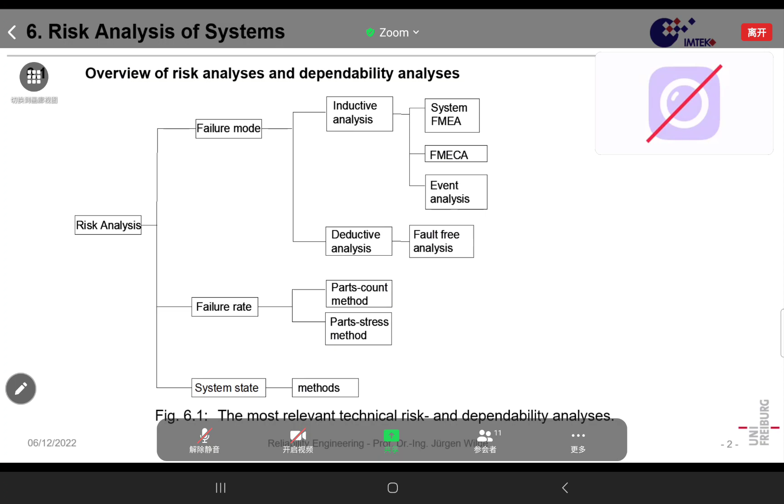Okay, there is a simple model, and that model is the so-called reliability block diagram. Imagine you have 3 resistors or more resistors in a series, or you could also say conductors, all carrying the current, and the current is the equivalent for the function of that system. So that means if you break one of these conducting elements, the complete current will break down, and you will have no more function.

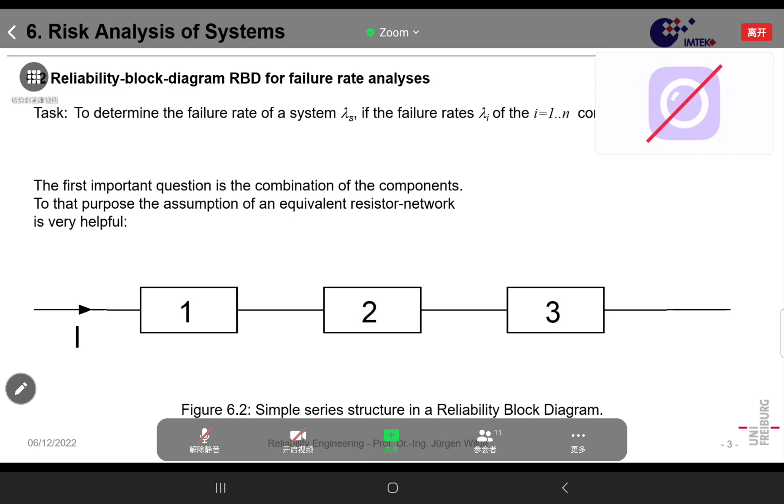Now, over time, as we know, the reliability will go down for every element. Now you want to know: you have two elements, and both elements must function after a certain time.

Then you could say the reliability of element i is Ri of t, and of the second, it is Rj of t. So reliability has gone down, and reliability, as we know, is just the probability of function. So we have here time, and we have here two reliabilities, that is i and that would be j. The probability that i works and j works is Ri multiplied with Rj.

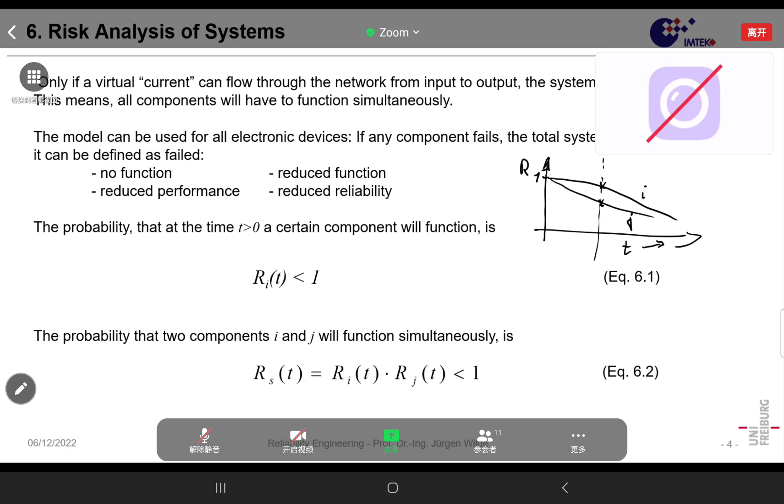And that simple model can be generalized to n elements. So if you have n elements, the system reliability will be just the product of all reliabilities over t, from element 1 to element n.

Okay, when you have that, you can say what is the failure function of element i? That is 1 minus Ri of t, and that is, if you assume an exponential distribution, 1 minus e to the power of minus lambda t.

In very short times - short always means significantly shorter than the mean time to failure of that element - then you could say the failure function, or the failure probability, is roughly the failure rate multiplied with the time. So here, lambda to the power of -1 is just mean time to failure in an exponential function.

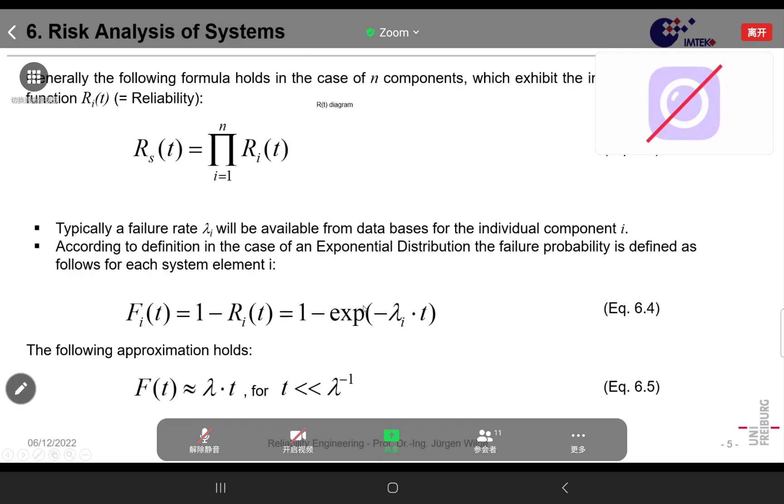So then when we have that here, we can describe the individual Ri by that exponential function. So here we see that Ri of t is e to the power of minus lambda i t. And then we multiply that - still quite simple - Rs is e to the power of minus lambda i t. If you multiply that, you can also take that in the exponent and add it in the exponent.

That's simple mathematics. And then you can replace the sum of lambda i just by lambda s, as the lambda of the system. In that way, you will see the failure rate of the total system is the sum of all individual failure rates. So in a serial system, we want to know the failure rate, we add them all, and then we have it for the system.

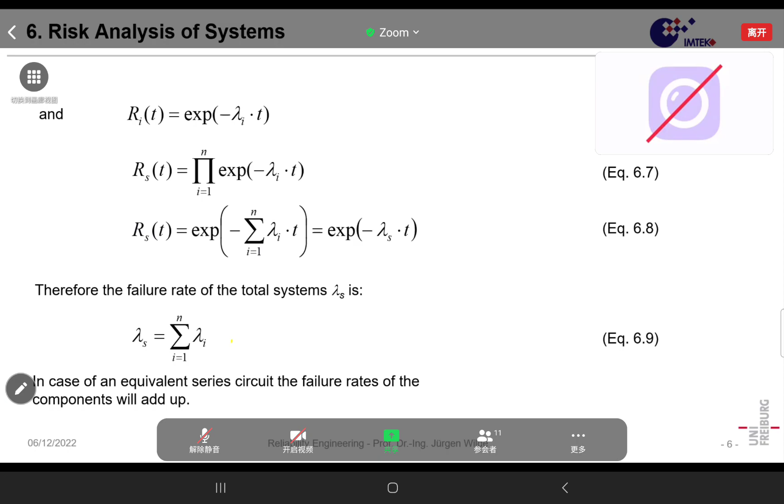If all conditions for all elements which we add up are the same, as I said previously, it's a parts count method - you just take some datasheet values and add them up, and then you get a certain value. And if you take it for the individual stress factors, then it's the parts stress method.

The t hat s, or also called mean time to failure, is just the inverse of the lambda of the system. That means failure rate is the inverse of the mean time to failure, or mean time to failure is the inverse of failure rate.

We already know that the assumption of an exponential function is, how to say, a crude simplification. A better method for description of failure rate over time is, of course, the Weibull function. That means the Weibull function leads either to a decrease of failure rate if that beta value is smaller than 1, or it leads to increasing failure rate if that beta is larger than 1. And if the beta is just 1, then we have the exponential function. So exponential function is a special case of Weibull function.

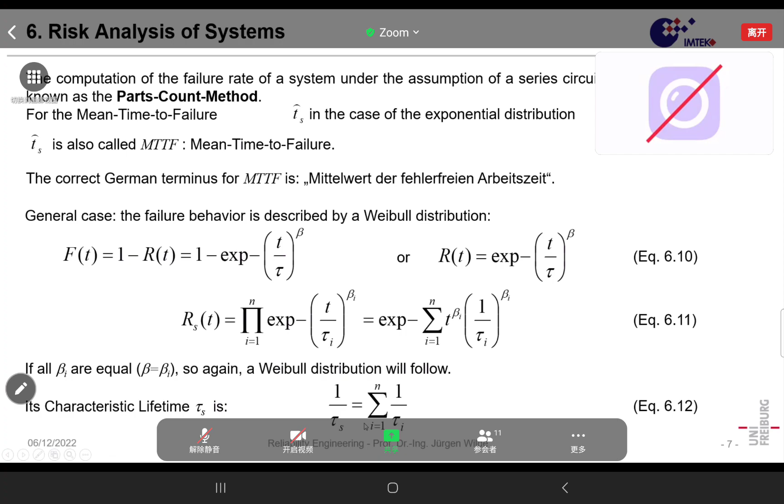And of course, it's the inverse of the characteristic lifetime. Okay.

On the other hand, in some cases we want to be safer against misfunction. In that way, we can think of another structure of our elements, where the elements are in parallel. That means redundancy, because we have that functional current here, and it can go through 1, 2, 3. In that case, we do not assume the function is increased because we have 3 elements, but it's just all 3 carry the function. And also, first of all, it's not considered what the performance is if there is only 1, or if there's 2 or 3 elements.

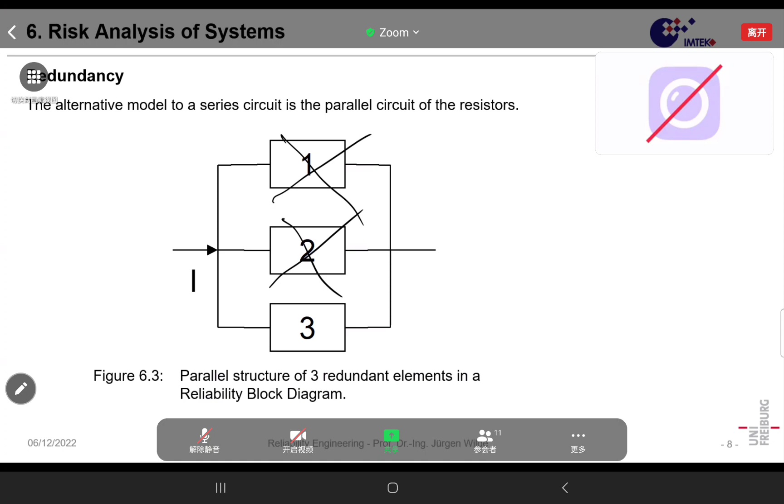It's just functioning. So imagine number 1 would be failing, then still we have 2 elements. If another one would fail, then we have 1 element... and if the system is functioning when we had 3 elements and only 1 is necessary, then it is 1 out of 3 redundancy.

In case, for instance, we would only allow 1 fails and 2 have to work, it is still functional. Then we have 2 out of 3 redundancy.

When would it be sensible? We still need, let's say, 2 elements for the system to function. In which technical case could that be necessary? Yeah, that is correct. If you only have 1, you don't know, is it correct or not?

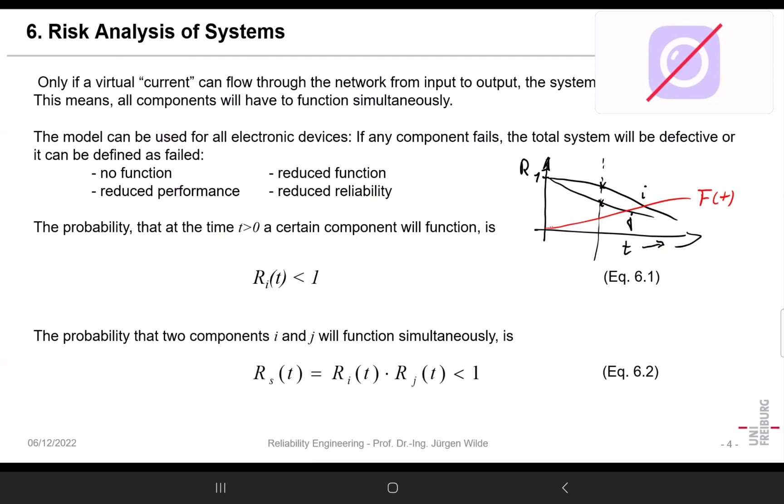And in that way, you can take an approach where you say, if all fail, then it's a probability that 1 fails, 2 fails, 3 fails, until n fail. So it's a product of all probabilities of the failure functions. And again, you can multiply that, and then you end up with 1 minus e to the power of minus lambda t in the case of exponential function.

And you can also say the reliability function is, of course, again the complementary, so it's 1 minus that complete product. So in that way we can calculate the system's failure function and reliability function.

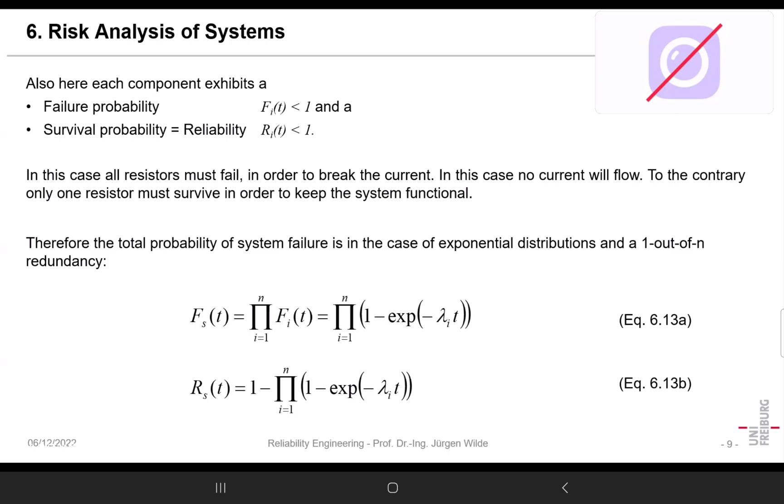Getting a failure rate then is not so easy. So here we take it only for 2 cases. You can always calculate a failure rate numerically based on the formula.

The failure rate h of t is f of t divided by r of t, and that is df divided by dt. So in that way we can get the failure rate. First derivative of the failure function is the so-called density function, and dividing that by the actual reliability, that is the failure rate.

Okay, we already know that from the beginning of the lecture. But taking that for a complex system is not so easy in an analytical way. So here we take it just on the basis of 2 elements having the same failure rate.

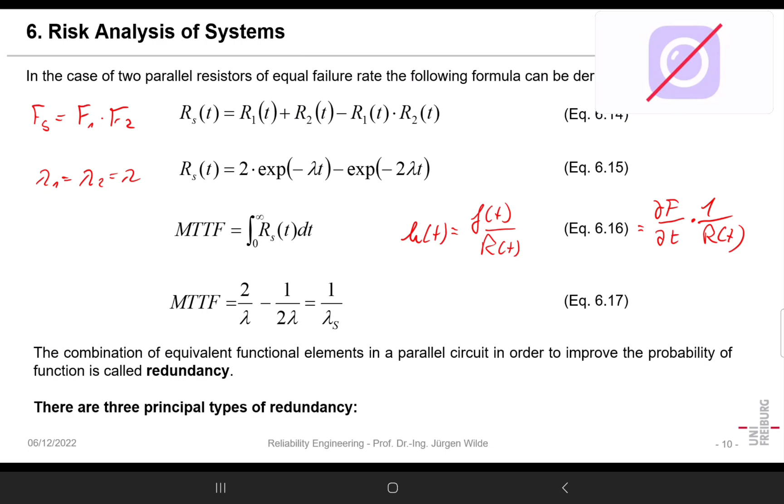Generally, so that was a little mathematics, but now we're looking more at engineering questions. There are three types of redundancy, called hot redundancy, warm redundancy, or cold redundancy. Hot redundancy means, like in an aircraft with 3 or 4 engines, all engines are running, and that has several advantages.

What are the advantages? All are running. Imagine another situation: you have 3 engines, and you only have 2 running. If one is making problems, you turn it off completely and turn on the spare motor. What would be the advantage of having all 3 running? Yes, that means the lag time is very small, or by definition it's 0. And it is there, it is in operation.

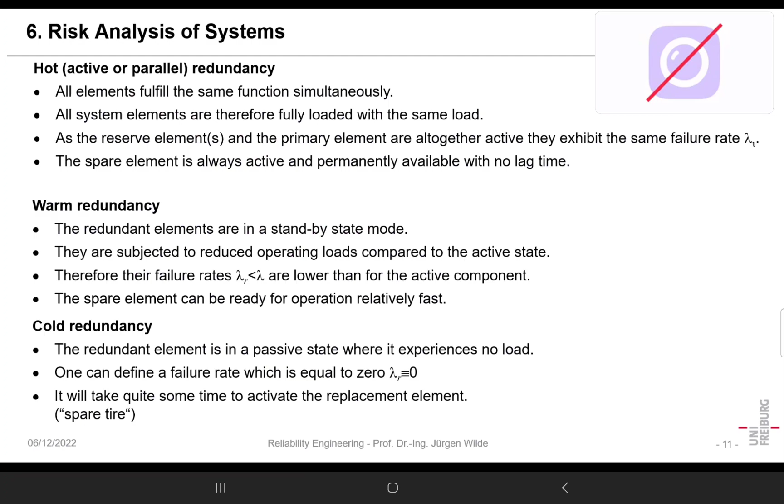Okay, in that way we have these three types of redundancy, and that means one thing for the reliability block diagram: the most important part is how we treat the failure rate. Hot is the same failure rate like an active element, because both are active. Warm means a smaller failure rate, and cold redundancy, by definition, the spare element has zero failure rate.

Here is something I took from the book of Birolini, Reliability Engineering.

He has the different cases, and sometimes I'm astonished some students learn all of these formulas by heart. I don't think that makes much sense, but important here is 1 out of 2 redundancy. That's easy.

Then we have k out of n redundancy. As I said, it means k must work when we have n redundant elements. That can be computed by the sum over i of n over i multiplied with R to the power of i, and 1 minus R to the power of n minus i.

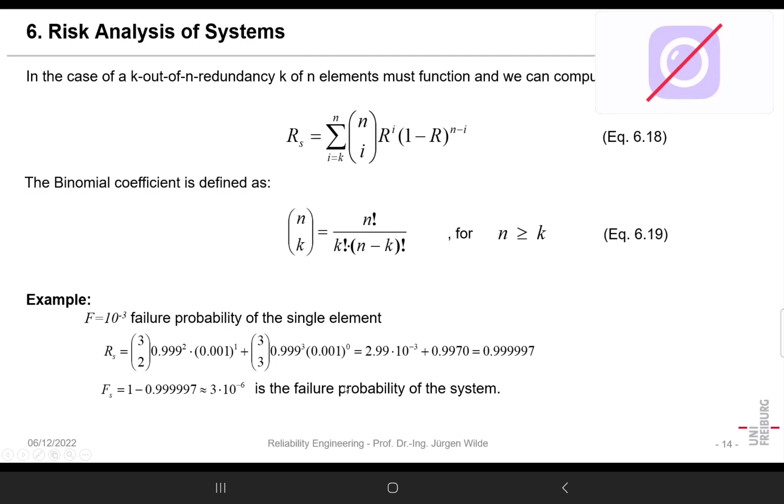So that is 2 out of 3 redundancy. That is okay. There are other cases.

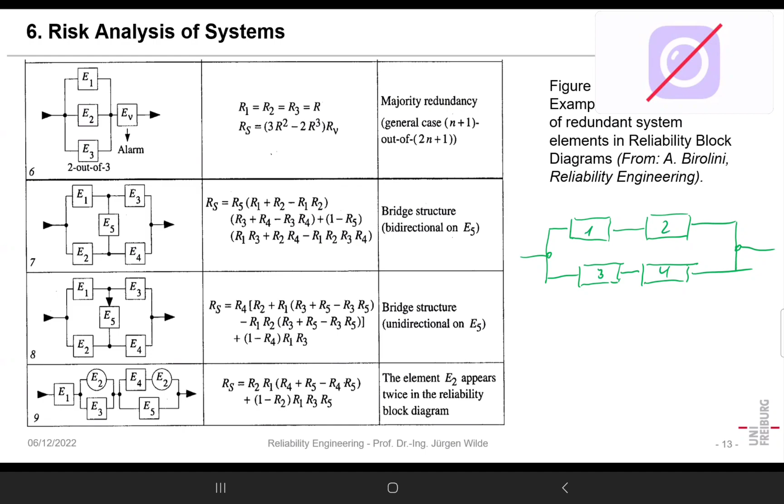Of course, 1 and 2 we could assume to be 1 element, and 3 and 4 should be 1 element, but the failure rates of 1 and 2 just add up, and the failure rate of 3 and 4 also add up. So we have redundancy, but the failure rates add up.

So if we have that functional current, and for instance if element 2 will fail, that complete branch will fail. But what would be better? If we would still be able... here 2 would fail, so the complete branch 1, 2 is eliminated.

What would be better is if we have a connection here, and typically we need an element for that connection, but we can simplify it in a way we say: if 1 and 2, if 2 is eliminated, we can have a current going here, or it's going here. So the redundancy between 1 and 3 is maintained. And that's more reliable than when we have just 2 strings in parallel, without cross connection.

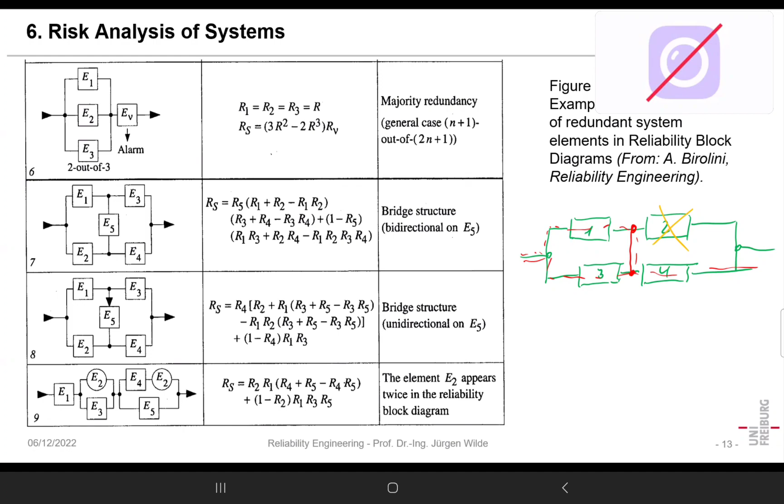Again, that can be modeled in a special way, but we will not go into the details. So there are many cases, and you will find that in the special textbooks.

But what is important, I think it's also easier to keep in mind, is when we have 1 out of 2 redundancy, and we have sensors. If, for instance, when you know that one of the sensors is dead, you could still assume the other one is functioning. So you could say, okay, if really that first sensor has a signal above 100% or 0%, and the other is giving an output, then you could assume, okay, that's clear. The first one is still functioning. One is completely dead.

But if you have both, let's say, in the range where you could expect a signal, so between 0 and 100% of full scale, then you must have some comparator which gives a decision, at least that both are different. But in that case you cannot be sure which one is correct, and then you must turn off the system. You must shut it down, or you must have some other solution for that problem, but you cannot rely on the sensors.

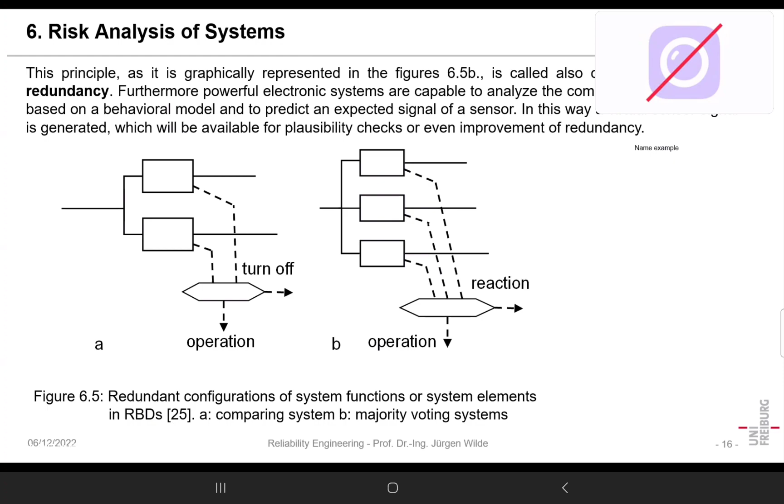Okay, in that way diverse redundancy could be helpful, but there are some disadvantages. Okay, but when we have majority redundancy combined with diverse redundancy, which means you have another principle, it is quite safe against having wrong values. So that means you have different transducer or sensor principles. You also in diverse redundancy have different assembly and packaging technologies.

In real diverse redundancy, for instance, because every sensor or so has a microcontroller or microcomputer in it, you have several types of microcomputer. You have different programs, so not the same software.

Maybe you have some source code, you can compile it for that microcontroller, both in C. It must not be the same C, it must be a completely different one, because otherwise you could have systematic failures. A good example was, I think 25 years ago, one of the first Pentium computers had a bug. The Pentiums then had an arithmetic processor as part of the processor, and that had a bug. Some multiplications just gave wrong results.

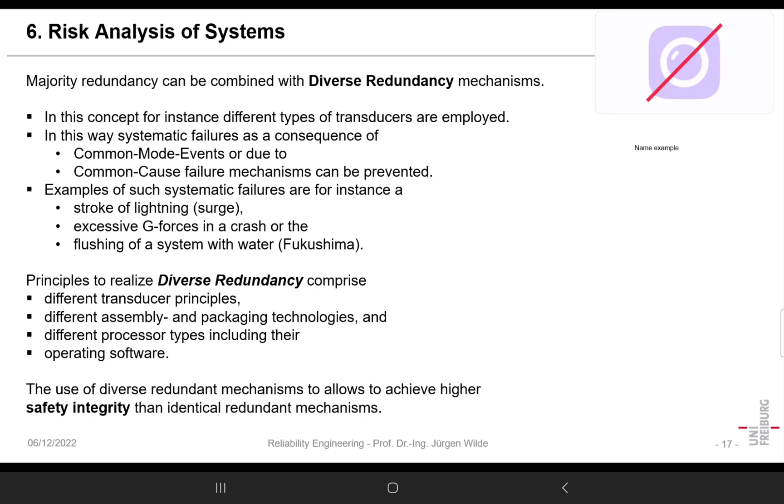Okay, now let's go to another representation of such serial and parallel systems. We can also model it with so-called fault tree analysis. And fault tree means the following.

We have some base events: base event 1, base event 2, base event 3. And the combination of these events leads to other events or not as a consequence. One of the possibilities is an AND structure. So we have base event 1 fails, 2 fails, and 3 fails. Then the system will fail, for instance.

What kind of redundancy is it? 1 out of 3 redundancy. So all have to fail, and then it is an AND, a multiplication. In that case, you would just multiply the probabilities of failure.

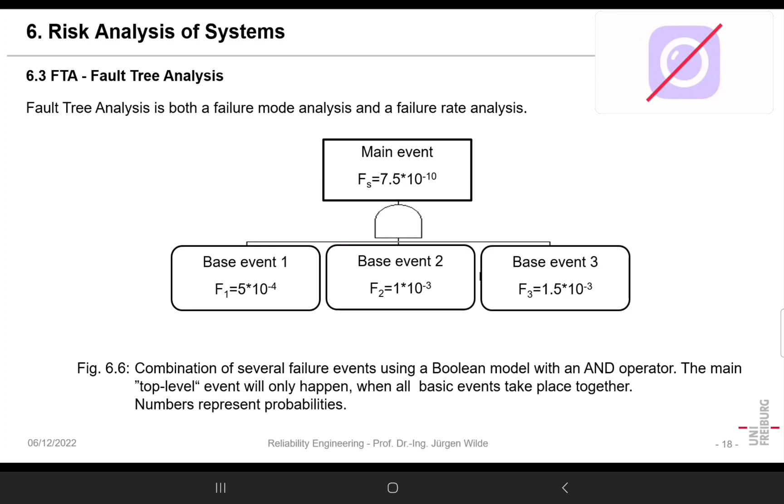In the end, we have the AND operator, but we've also seen behind the reliability block diagram we also have the AND operator. Okay, here we can also have the OR operator.

That means if base event 1 happens with a probability of 10 to the power of -3, and base event 2 happens with the same probability, we end up with roughly a probability of 2 times 10 to the power of -3.

Adding up normally is not quite correct, because mostly it's based on multiplications. If we add up, it's typically when we have small probabilities or very short times, then we get some estimation of that.

Otherwise, we would have to go for reliability. That would be 0.999, and here also. Yes, multiply it. And in the end, when we take the complementary, we end up with F_s.

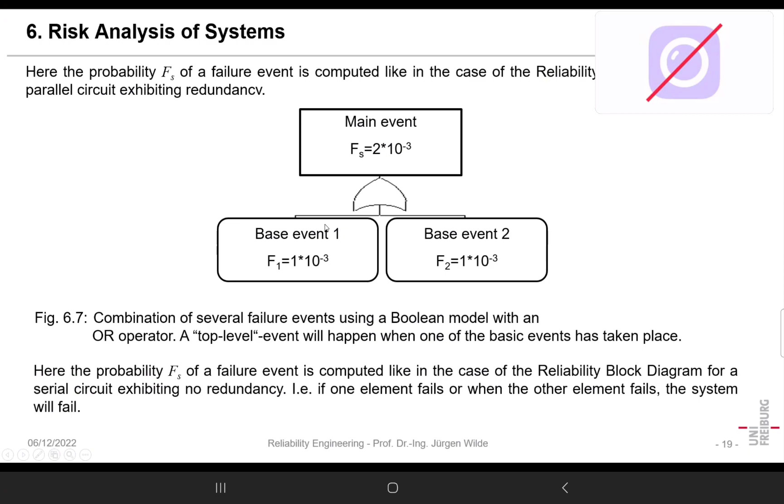Okay, there's lots of literature and so on, but I think showing these is the most important for these deductive methods, which can also be used for failure rate computation.

Okay, now we would like to see a more general method to compute reliability function and failure function. And we can start that with an element where we have in fact two different functional elements, and both are redundant, and we have that cross linking.

For instance, what could it be? It could be a sensor with the instrumentation electronics, and another redundant sensor with instrumentation. And if either one of the instrumentations fail, then we still have redundancy in sensors, or if one of the sensors fail, we still have function in the other two.

Okay, now we can ask ourselves how many possibilities do we have for the system to be in a certain state? What could be different states of the system?

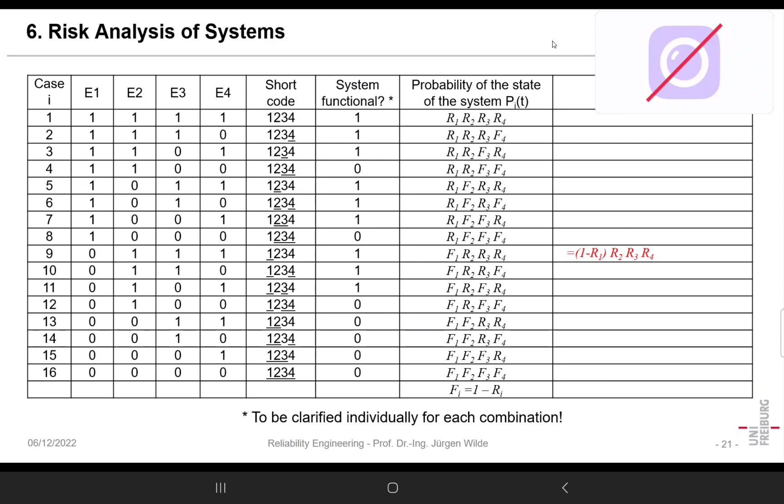Okay, and in that way we had a first step. Of course, when we have complex systems and we represent them, we have to make the table for that. Maybe that's still easy. The second step is to decide whether the system is functional, but that can also be done in a more complex system based on some computer work. You can make, for instance, some search function which looks if there's a path for that special case, and if there's a path, the system is up. If there's no path, the system is down. In that way, we can have a look at more complex systems.

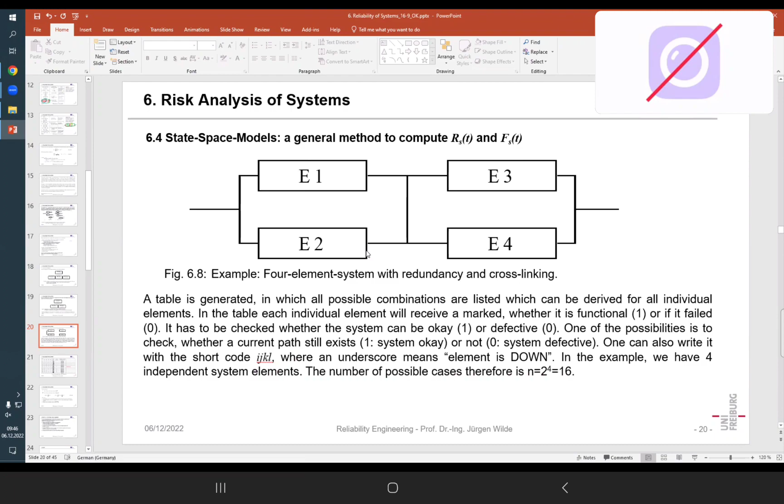Professor, hello, can you hear me? Okay, see you, hello.